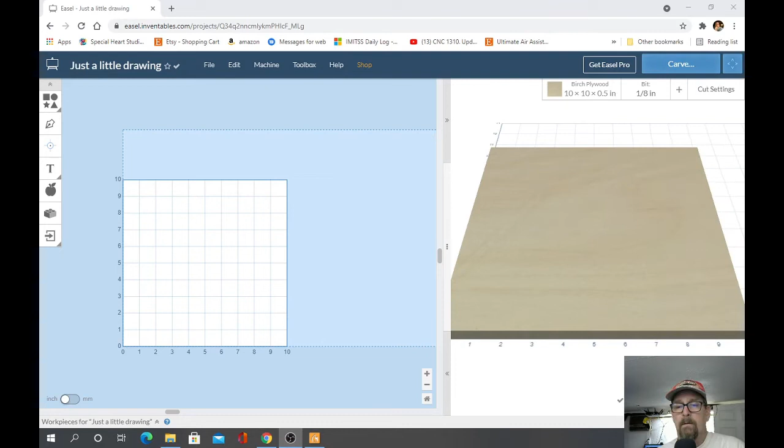I'm gonna load Easel up here and just give you a rundown of everything. The white area is your project, or your piece of wood or material or whatever you're cutting, whether it be aluminum, copper, and if you're so lucky to have a 300 watt spindle or bigger, and you want to cut some stainless steel at 0.01 millimeter depths per pass, because that's some hard stuff, this is what it is.

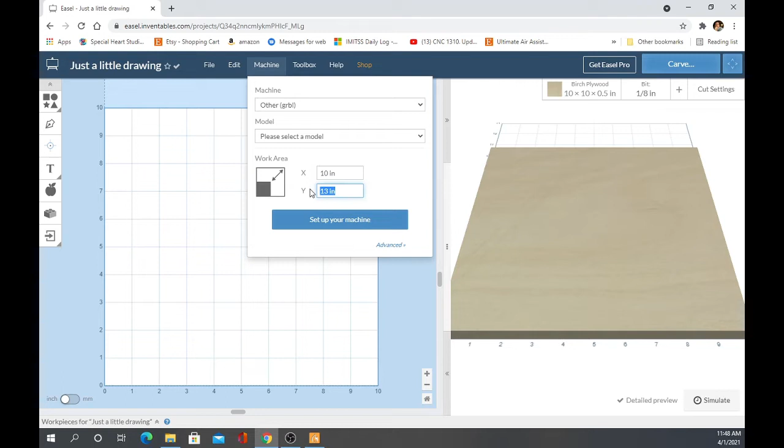The light blue or turquoise, whatever it is, this is your machine surface. This machine surface can be adjusted here in this area under machine. Your work surface can be adjusted over above your work piece.

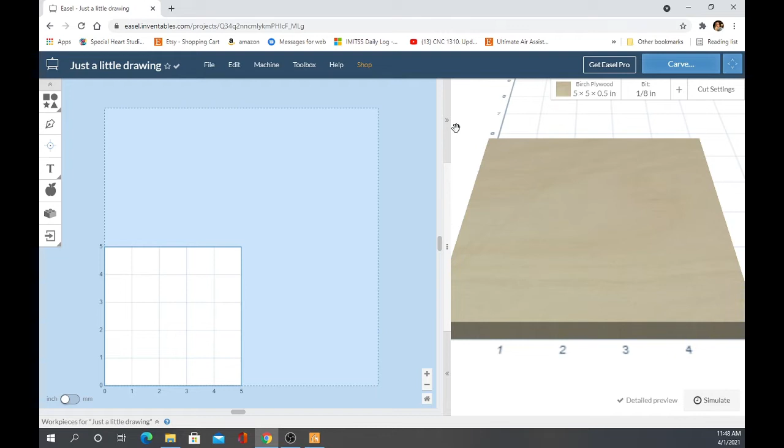Now what I'm going to be cutting today is a 5 inch by 4 inch piece of poplar, and it's rather some soft material. It's only 2.7 millimeters in size. I'm just going to scratch the surface. Now I can adjust this to show what kind of material we're cutting. I can do 2.7 millimeters here, and it'll reflect that on the screen.

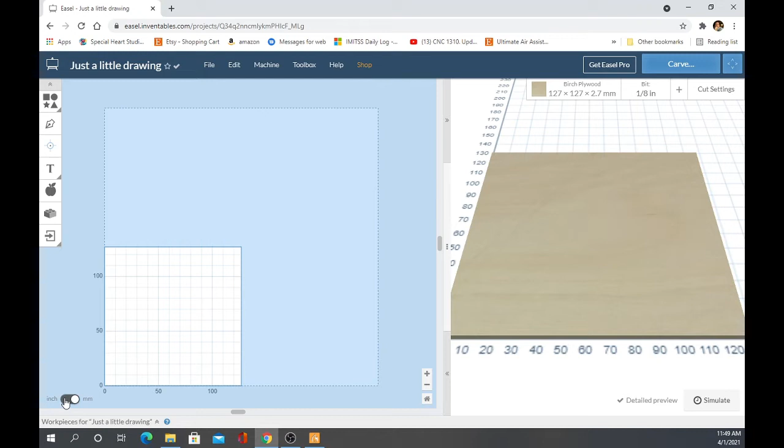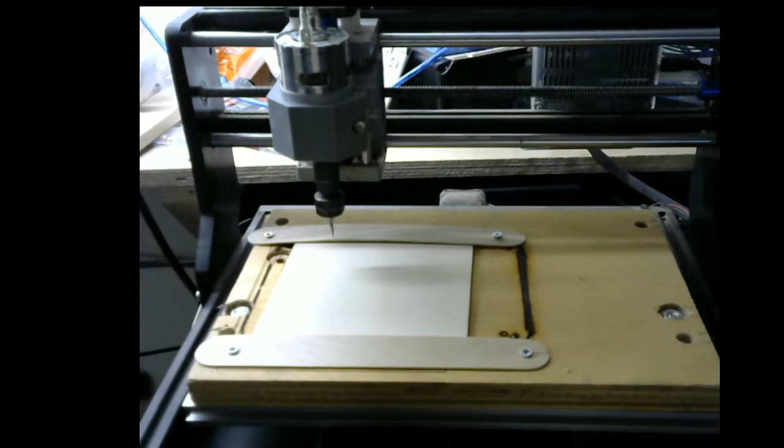What I hit down here on the lower left-hand corner is inches to millimeters. My machine deals in nothing but millimeters, I personally deal in inches, so you'll see me scroll back or flip back and forth between inches and millimeters. Nothing spectacular, nothing surprising, nothing of the sort. And as you see on the machine here, it is 4 inches from top to bottom, and then 5 inches. Okay, so I have that reflected here on the screen.

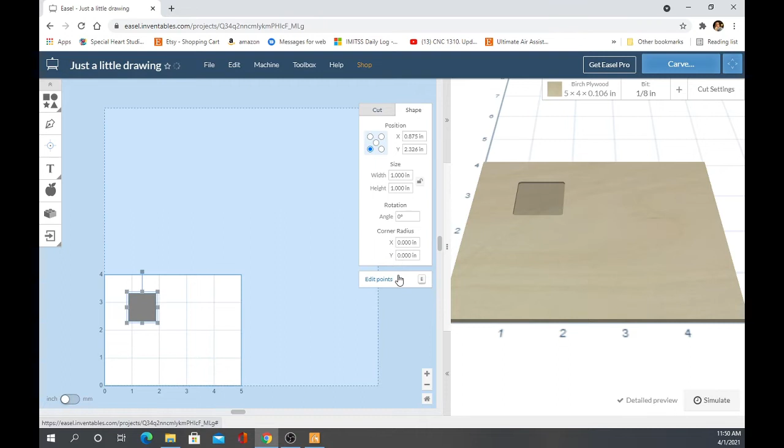So let's do a shape. Click on shapes, I'm going to just do a 1 inch square. Now you just click on it and it places it. You can move it around and it reflects over on the left hand side or the right hand side on your piece, or what it's going to look like. Now I don't want to cut this out, this is going to be approximately 2 inches by 2 inches. We want 1 inch by 1 inch, and we do not want to cut out. We want to cut outside path.

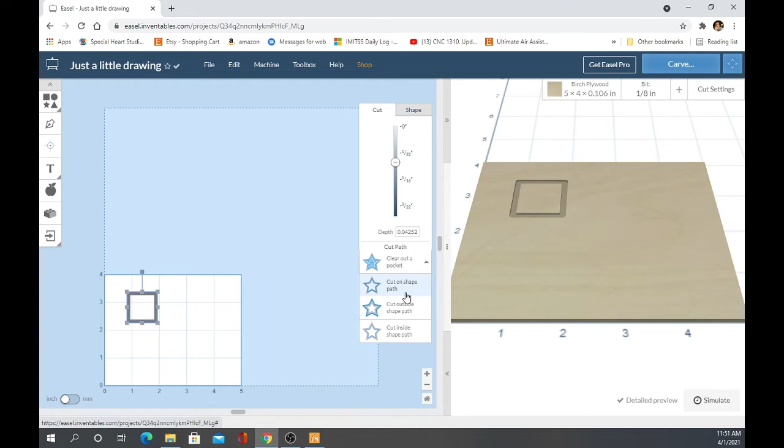Now I'm just going to give you a real quick tutorial on this. Nothing spectacular, nothing fancy. Inside is going to cut the inside of your shape, obviously. Now, let me give you a word of warning: it's going to go to your 1-inch line and cut all the way around on that 1-inch line. If you have an 1/8 inch thick bit, you're only going to end up with a 3/4 by 3/4 inch piece of wood, because your bit is on the inside of that line, on the 1-inch line. If you cut on the outside, your bit is going to be on the outside line of a 1-inch square, leaving you 1 inch by 1 inch square. If you cut on path, and you have an 1/8 inch bit at 1/16 of an inch on both sides of the line, leaving you with 7/8 of an inch piece of wood by 7/8 inch piece of wood. So we're going to cut, correction, outside path. Nothing spectacular.

I don't want to do 2.7 inches.

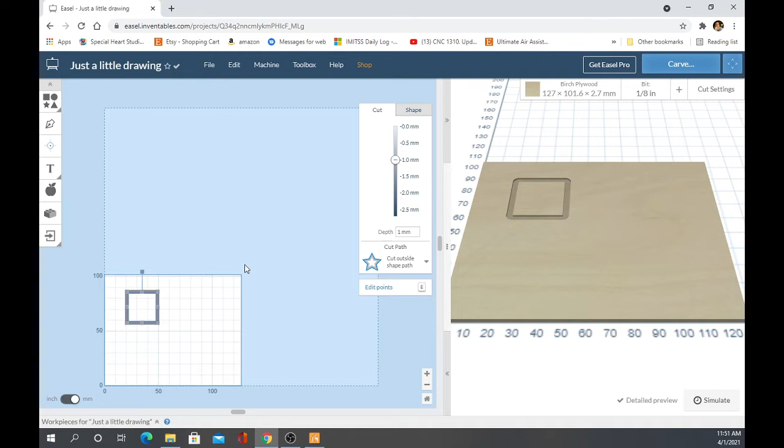I want to do correction, not inches, millimeters. I want to do 1 millimeter. 1 millimeter isn't all that great, it's about 1/16 of an inch or so. I had to pick up my micrometer, sorry.

And we could put this wherever we want: inside, outside box, or middle of our material. We want to put it in the middle of the material.

Roughly, you know what your material is in size. You're going to measure it. Be sure to keep away from your hold downs. I've got a hold down all the way across the top and a hold down on the bottom, as you can see on the screen here.

1/2 inch. I'm using some crafting sticks that my wife has, and 2 1/2 inch screws to hold this down. It's nothing spectacular, it's nothing fancy. Just they're hold down sticks, that's all they are, that's what I call them. But they're crafting sticks for my wife.

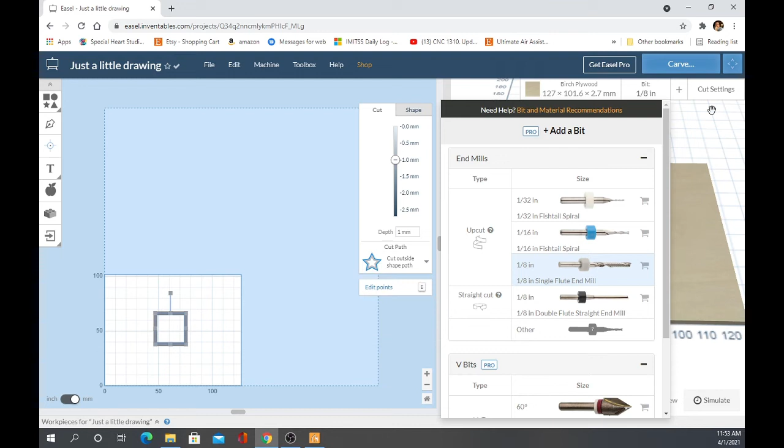So without any further ado, let's continue. So this is all we're going to do: we're going to cut out a little piece of wood. Okay, 1/8 inch bit is what I want. I could probably do 1/16 or 32nd. 1/16 would probably be better, but I just, you know, it is what it is.

It gives you a little more accuracy, it increases your feeds and speeds, and that's another thing I want to touch on right now. Easel has a great library, and they pretty much know what they're doing at all times. Okay, it's going to try to do 762 millimeters a minute. It's going to plunge at 228. That's fine, and it's going to cut at 0.07 millimeters per depth.

I don't like those numbers, so I'm just going to change them. Now I'm going to change this to 0.5, okay, just to be on the safe side. You know, I don't like, and it's poplar, it's soft. Depth I'm going to leave here, and I'm going to leave my

feed rate alone, and this is all manual, not automatic. I use the automatic just to get me the basic numbers, and then I can adjust them from there, and it depends on what's going on.

Now, I always test on a scrap piece of wood whether my machine's going to cut or not. So if I jump into a piece of wood and I accidentally have it set to 2 millimeters, my machine will do it. It's going to jump, shake, and shimmy. It'll do it, and the cut's going to be ugly.

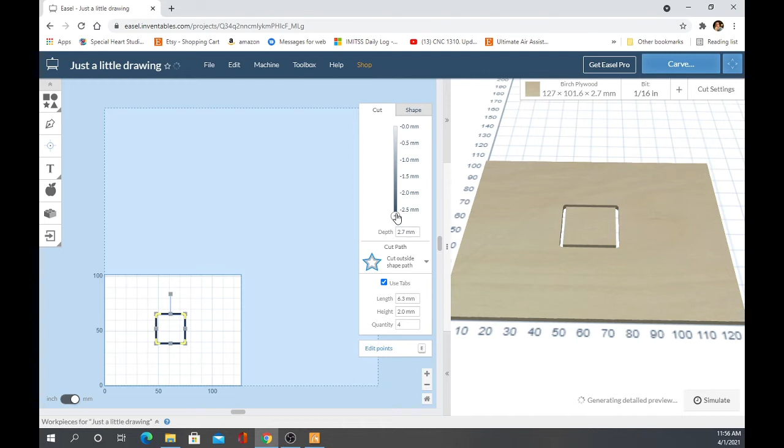As you see the yellow here on this, and I know I'm bouncing around, I just thought about it - those are tabs the easel puts into place. I don't like those. If you come off the bottom, they go bye-bye. They're just so the piece of wood doesn't move once you do your final cut.

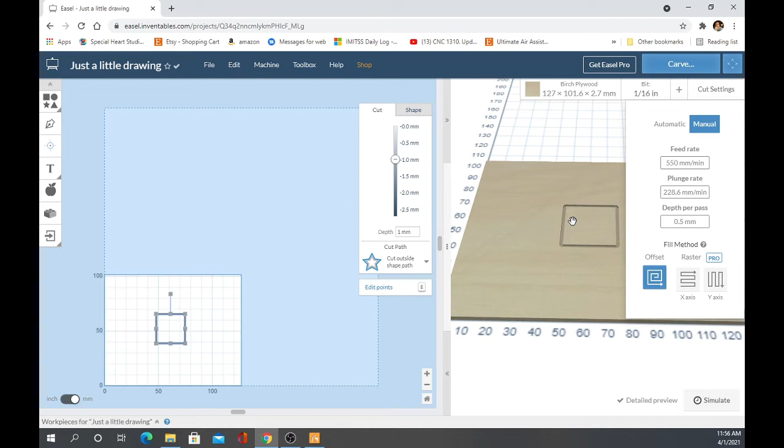Let's put this back at 1mm, 0.5 millimeter depth per pass, 550 millimeters per minute, and 228.6 - that's just a number carried over from the automatic settings. The 550 and the depth per pass is what I changed. These right here I just leave alone. I do an offset cut, offsetting it by 40% every time - that's 40% of the previous cut - and I'm good. Never mess with that. So everything looks good.

I'm not going to get in too much more detail here. I'm just going to get up on out of here. I'm going to show you how to save without using Easel. I don't like using Easel to send to my machine for numerous reasons.

The main reason is my internet sucks. I mean, I have good streaming internet, don't get me wrong, but I don't know when it's going to go up or down. And if I'm in the middle of a cut and that thing's going 2 inches deep and my internet goes bye-bye, it'll crash my machine. So we're not going to do that.

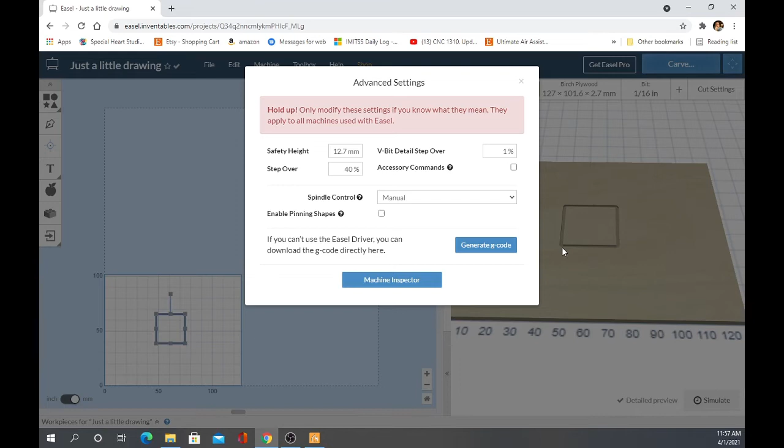So I save to a Gcode file and then I run it through Grbl locally using USB cables. So in order to do that, let me back out of here. You go to your machine, you go to your advanced button down here on the bottom, and you generate Gcode.

Now, this one was fast - it typically takes a little bit, and I'll redo this again. But here on the side, you can see how it's going to start, go down, and then cut around it. You can visually see the way this is working.

Here in Easel, okay, I don't really care about that. I just like to make sure I don't have any red lines outside this box or outside my cutting area. These red lines mean that's a tool travel, and it's rapid travel. So this machine is going to pick up and beat feet as fast as it can to this next point or next cut.

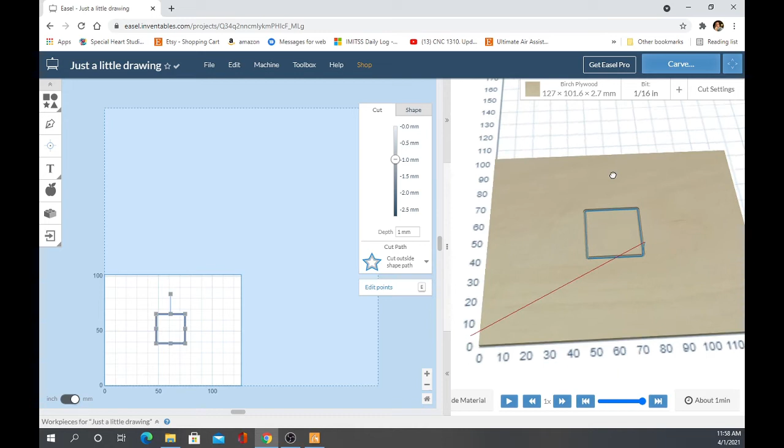So you can visually see that if you have any red lines outside of your material or outside of your cut area, you're going to hit a limit switch or you're going to crash your machine. Crashing your machine, if you have a big beast like I do, could be very expensive. So we always make sure that we're within our cutting area.

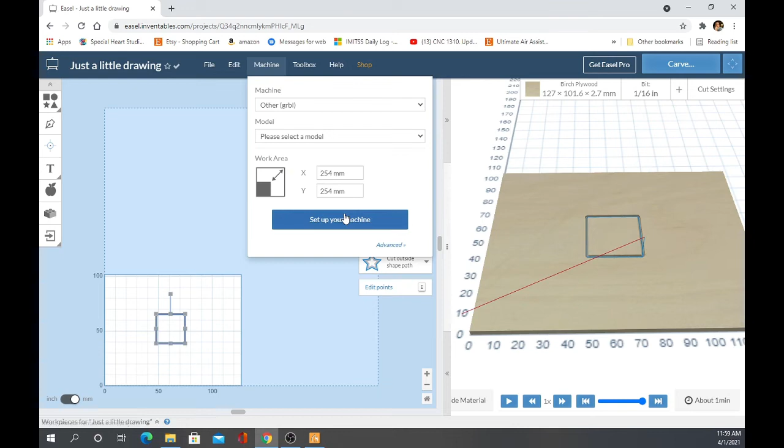So let's go back in here, go to advanced, generate Gcode. I changed nothing here. This is my step over, 40%. It does whatever. Safety height is 12.7 millimeters, not meters - it's a big machine. And just export Gcode.

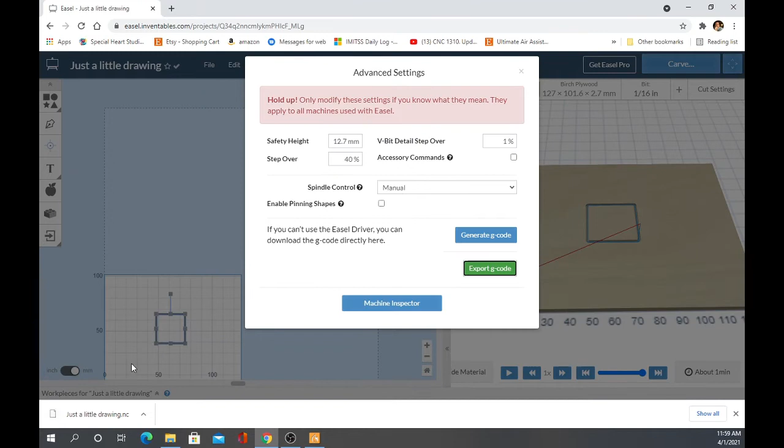I'm going to save it to my desktop, into my CNC folder, and we can name it whatever. I'll rename it later so that I can share it with the Fox Alien group. And as I say, just a little drawing, and I'm going to save it. Okay, now with that being said, I'm going to get up on out of here.

I don't need this no more. It automatically saves - I don't have to worry about any of this stuff. You can publish it, whatever. I don't care, I don't do any of that.

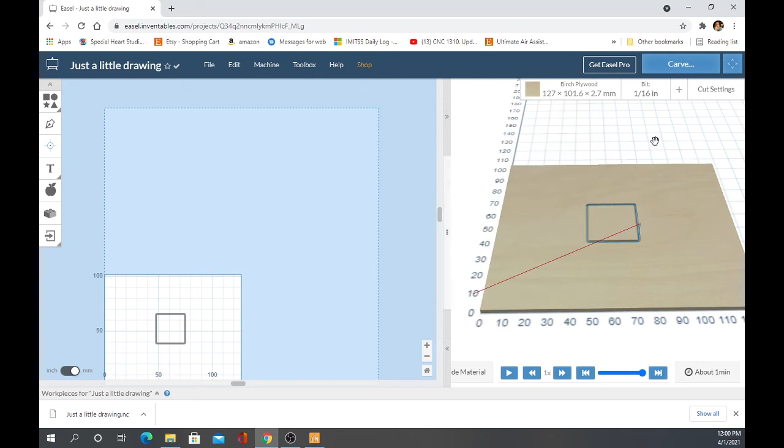With the extent of everything I showed you, that's pretty much what I do, aside from import SVGs, resize them, adjust my material here, select the material I'm using. I never really mess with the machine settings or whatnot. If I know I've got a 10-inch piece of wood by 10 inches, I'm going to make this adjustment here. If it's outside the scope of my machine, I make sure my machine can handle the size of the material that I'm putting into it.

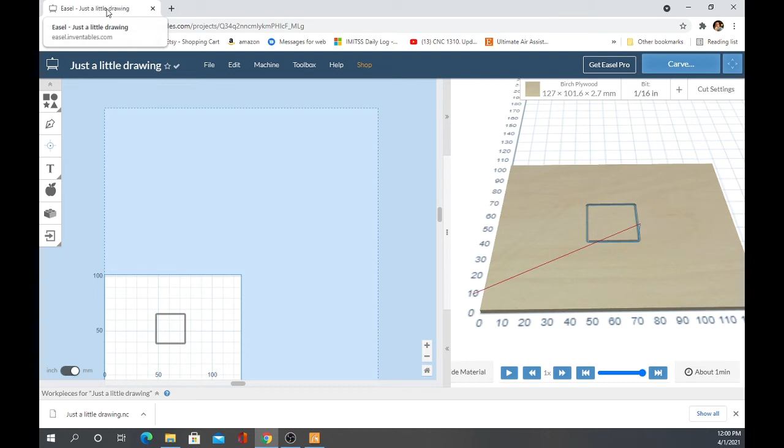So now let's get to the machine. First off, I need to bring up Candle.

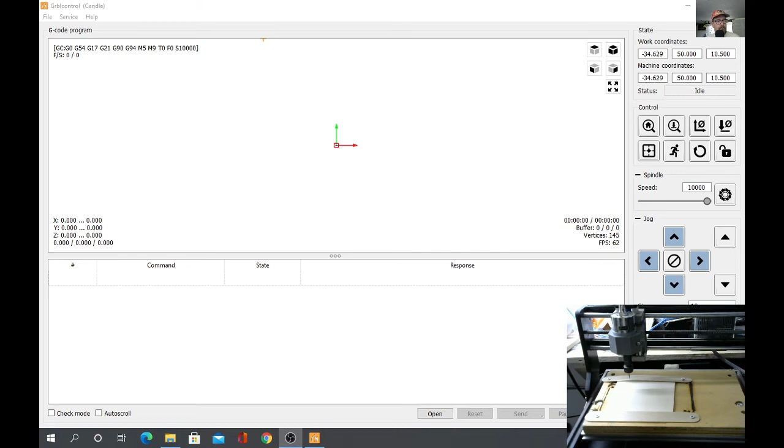My machine, Candle, me - I don't need me in here, so I'm just going to take me down to a little bitty guy down here, put it way up here on top. So with my machine here, I'm going to move the machine over too because I don't need those here. I need you to see these. I'm going to be adjusting my machine so that we can start cutting.

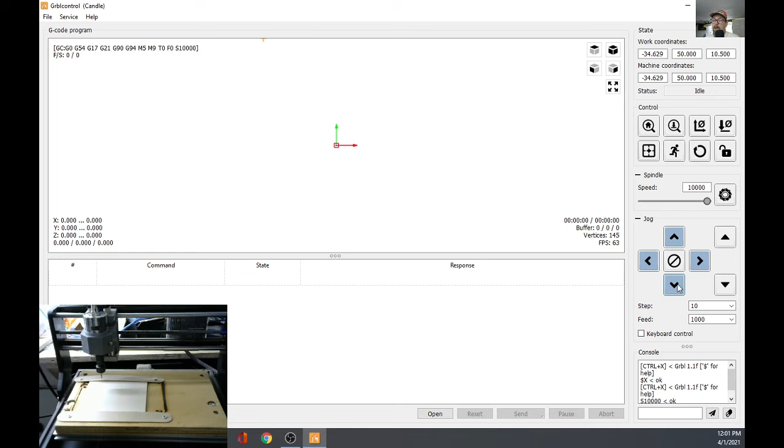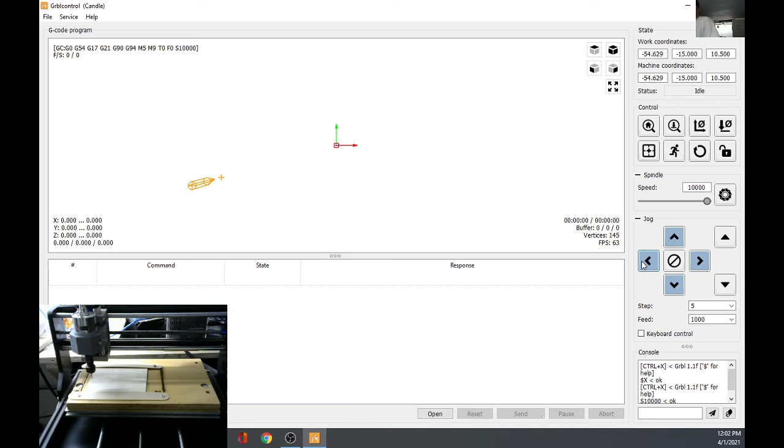And I need to stand up so I can see my machine because it's up a little high. I'm going to adjust this so I can fine-tune my machine a little better. Let me bring up the machine so you guys can see a little bit easier.

With this, we're going to use a piece of paper, nothing fancy, just a little piece of paper, and we're going to move it back and forth. Now with the steps I'm going to show you here... too high. So we're going to change this to 1, and we're going to scroll down, moving the piece of paper back and forth just ever so slightly. There we go. Now it still moves, but it's not cutting the paper, so we're good.

Now at this point we can do several things. I'm going to leave my machine alone, I don't need my machine right yet. I'm going to go back to Easel, or correction, Candle.

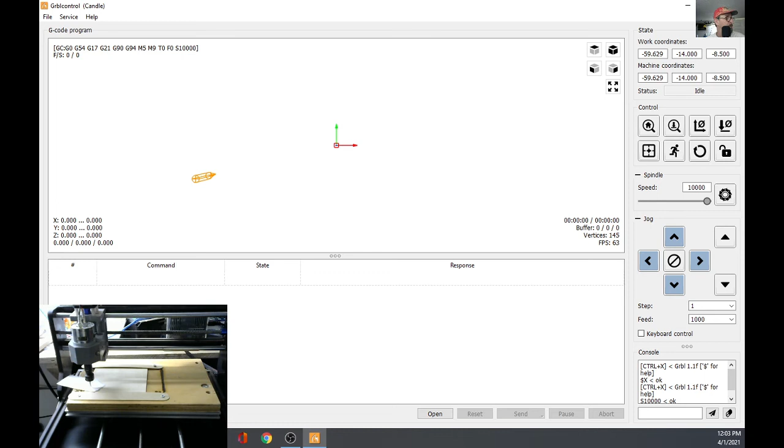At this point I've got these numbers up here, -14. These are the work coordinates. I really don't like those numbers. So what I do is I actually shut Candle down, just physically shut it down, and then I restart Candle. Everything comes out at 0.

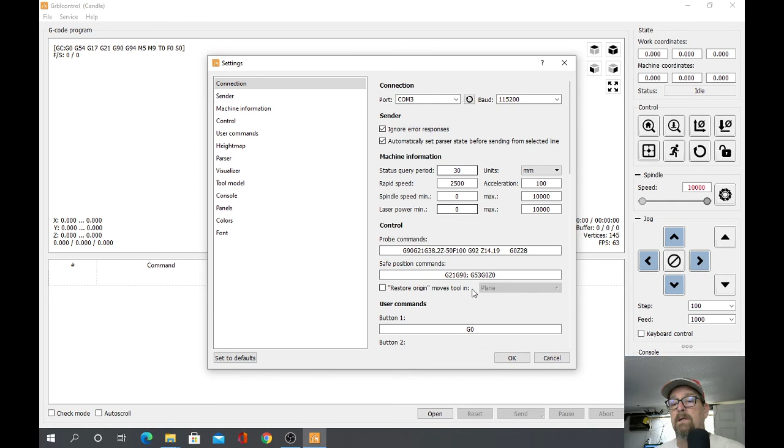So now I pulled my spindle, my Z, out. It doesn't matter, because my work coordinates are still where they should be. I do not want to hit these buttons right here because everything's already set. It's all zeroed out from the previous step.

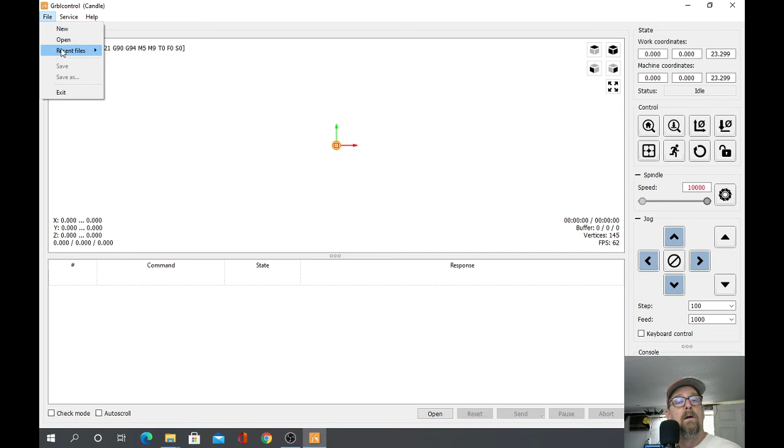So at this point I'm going to go find my little G-code that I created earlier, and I'm going to port it in. And as you can see, same thing, there's nothing special about it. And we're going to just want to send at this point.

Now I don't do anything special at this point. I've already done all the hard work in Easel, and I've already set my machine up.

And my machine is, yes, up. I don't know if you can see that or not. Let me move the machine closer to the camera. It's doing what it needs to do, so I'm just going to hit send.

Now I'm going to bring Easel back up again real quick, or not Easel, but Candle. You got these buttons right here. When you send, the pause and abort button are active. Until you send, they're not active. When I send, I automatically move my cursor over to the pause button. I do not have an E-switch or an E-stop on my computer.

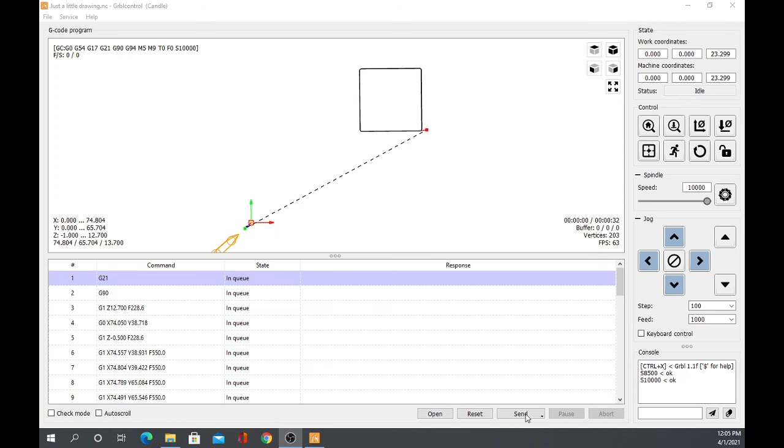So I'm just going to go ahead and send. The machine should start up by itself. Okay, so let's get going. So first off, I always turn my spindle on.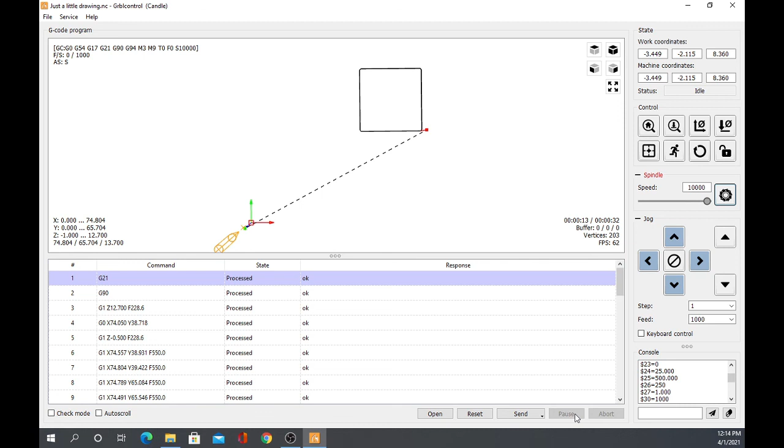We're up as high as we can go, 10,000 RPM. That doesn't sound like much, but it is. And then we're just going to send the G-code. Like I said before, once you hit send, the pause and abort button become active. I hit send, I always put my cursor on the pause button. So I'm going to change screens here so that y'all can see what's going on.

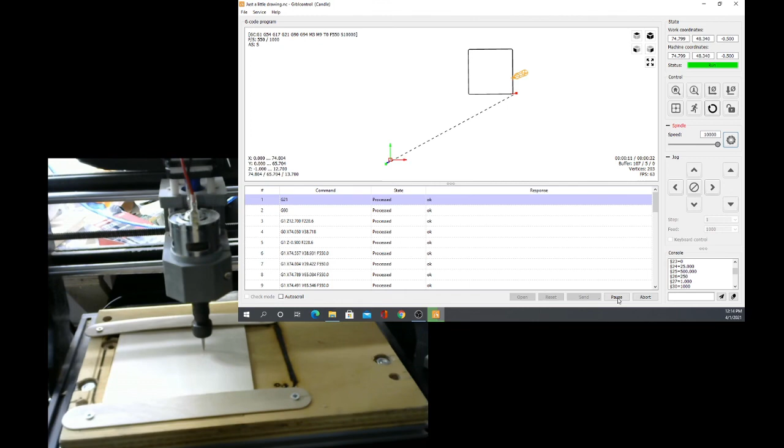And I'm going to hit send. Now the machine will start moving. Let's see what it does. It's going to come in, it's going to barely touch the material. And it's barely touching. It should go around twice, doing 1 inch, at 0.5 millimeter depth.

The machine should go back to where it started. And done. That's it, I'm going to show you what it does. Let me move my camera over a little bit.

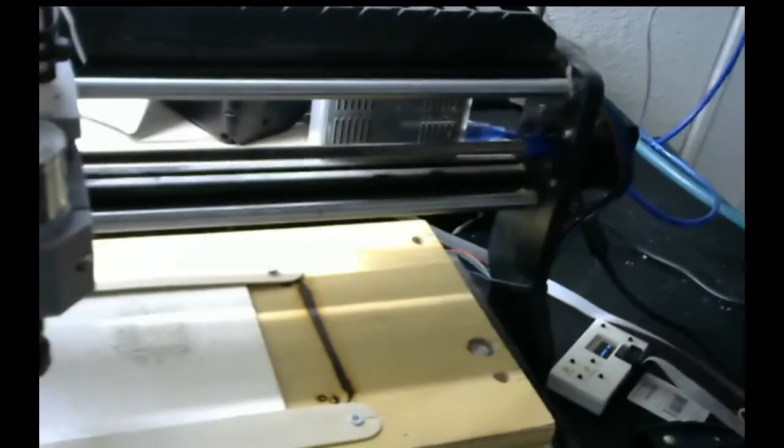One inch. I don't know if that's exact 1 inch, but that's the basics.